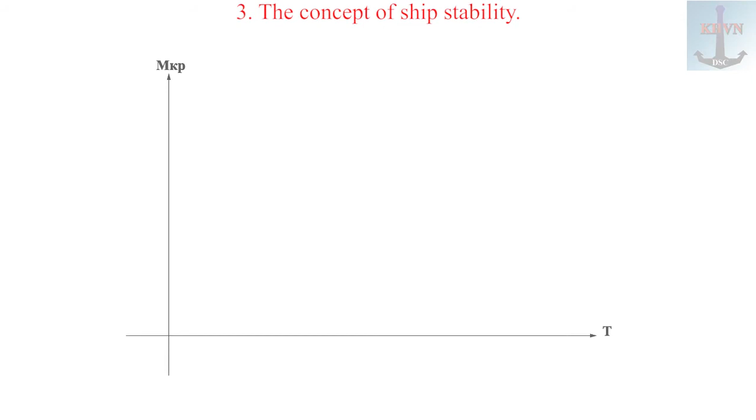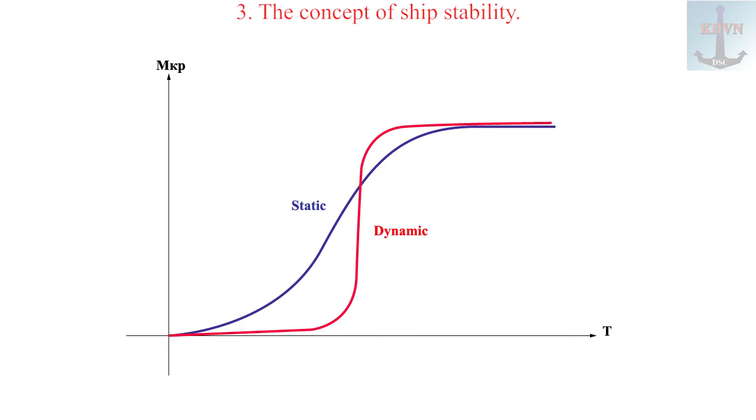From the nature of the effect, static and dynamic stability are distinguished. On the graph, dynamics are shown in red, statics in blue. It can be seen that the dynamic moment is more rapid in time.

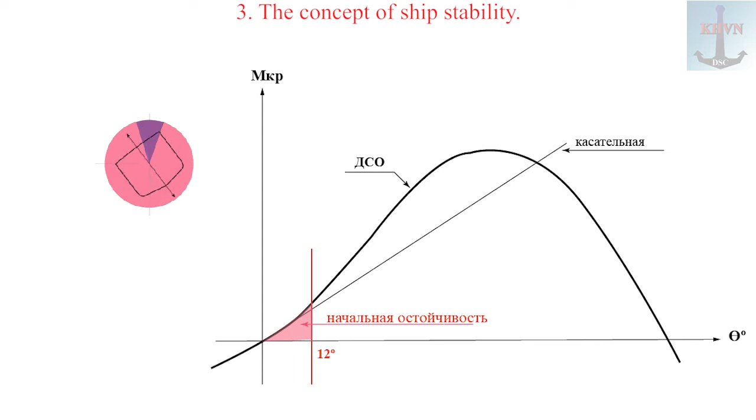Statics differs from dynamics in the absence of inertia forces and water friction resistance. Stability at small angles of heel, up to 15 degrees, is called initial stability and is different from stability at large heeling, where slightly different rules apply.

3.1 Metacenter and stability limit. To begin with, let's deal with the metacenter, point M. Other points G and B, I hope, are clear - see the last lesson. In the theory of vessel stability, there is a concept of three metacenters: initial metacenter, true, and imaginary. I will consider two of them.

The true metacenter is the point M1, and the imaginary one is M, without an index. The initial metacenter is not so important and is out of our interest.

Let us consider the projection of the midsection of a ship afloat with good positive buoyancy. We heel the vessel by a virtual heeling static moment to the right and observe the behavior of point M1, the true metacenter, and point M, the imaginary metacenter.

With initial stability of 12-15 degrees, these two points practically coincide. Increasing the heel more than 15 degrees, the true metacenter M1 begins its downward migration along a curve called the evolute, and then continues its slide down the direction of the support force.

At the same time, the imaginary metacenter, point M, remains motionless for a long time, which is what makes it convenient. That is why this imaginary metacenter appears on all diagrams and drawings and is used in all practical calculations.

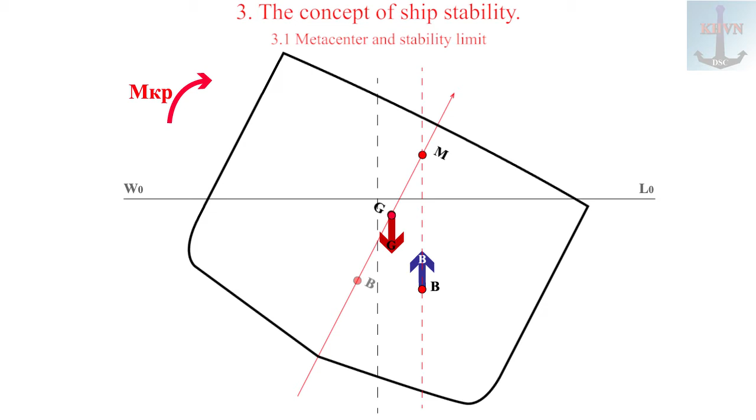Therefore, I remove the true metacenter M1 from the animation and leave the point M on the screen, the imaginary metacenter. In the future, it is simply referred to as the metacenter, denoted by the letter M, without any index.

Let me remind you that it is the point of intersection of the guiding support force B with the center plane of the ship.

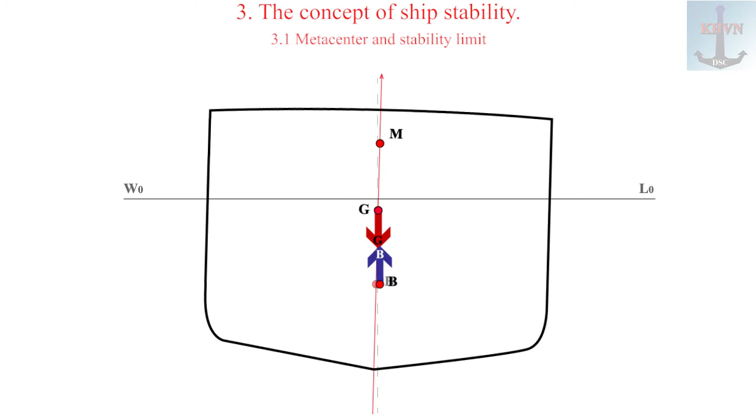Let's play the ship virtually heeling until it capsizes. The metacenter will be stationary up to a certain angle of heel. In this example, it is about 27 degrees when the deck entered the water.

The metacenter, which until this moment was not mobile, will begin its movement down along the z-axis. The ship begins to lose its stability.

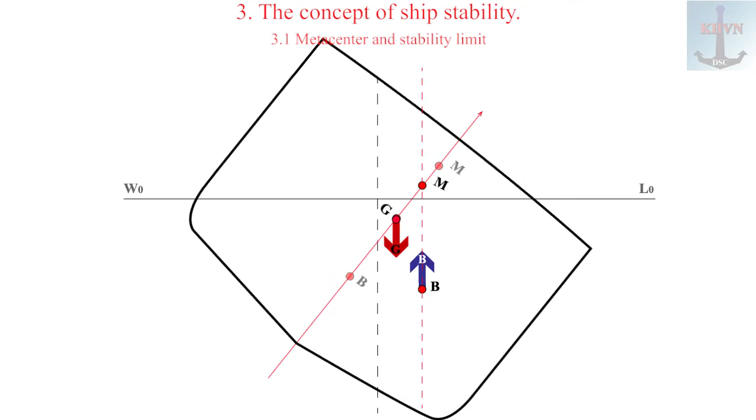The process will accelerate after the exit of our left shoulder from the water, that is, when the immersed volume of the hull begins to change significantly and the center of buoyancy, CB, begins to move back, to the left.

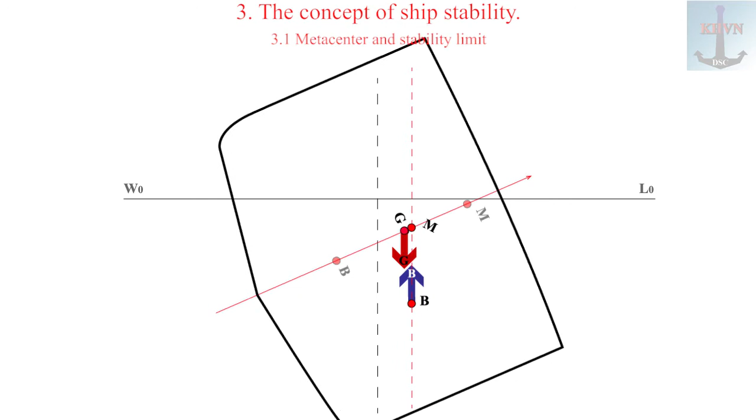When the metacenter reaches the center of gravity, CG, a position of indifferent equilibrium sets in. Here it is a heel of about 25 degrees. The ship is indifferent, according to the principle: we were pushed, we fell, we were raised, we went.

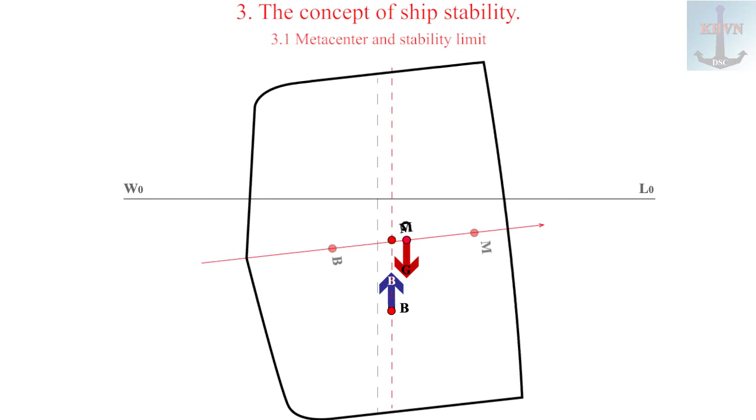Therefore, at the slightest increase in the heeling moment, the metacenter will be below the CG and a couple of forces will already help roll it over. The ship is doomed. 3.2 The position of the metacenter M and the center of gravity G.

From the geometry of the figure on the screen, it can be seen that the value of the metacentric height depends on the position of the points M and G.

So, the position of the metacenter M depends to a greater extent on the shape of the ship's hull. The decisive role is played by the width of the vessel, as well as the height of the side and draft. The figure shows two vessels with different widths, but with the same displacement.

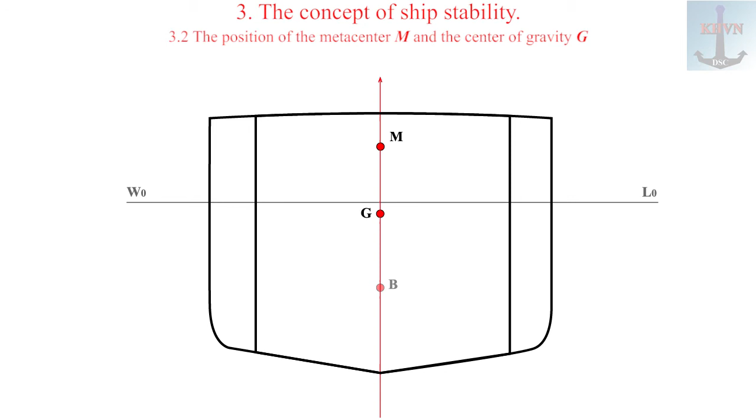One is long and narrow, the other is wide but short. The list for both is set the same.

Obviously, to heel a wide vessel takes more effort than a narrow one. With the same draft, they have different volumes underwater, so different center of buoyancy movements, and metacenters located at different heights.

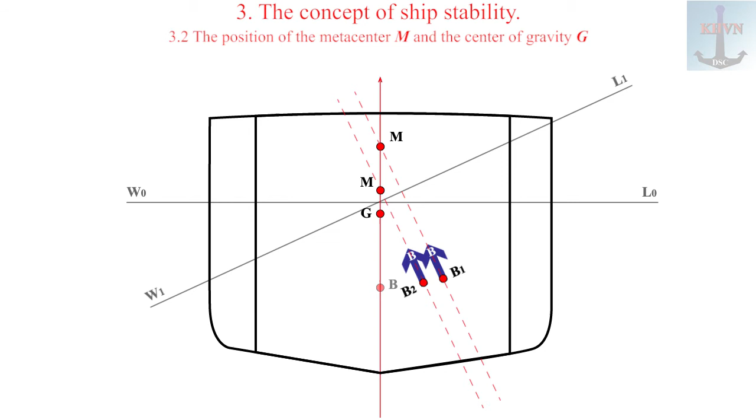I state without any calculations that a tug or supplier is more stable than any cargo vessel. A heavy lifter does not count.

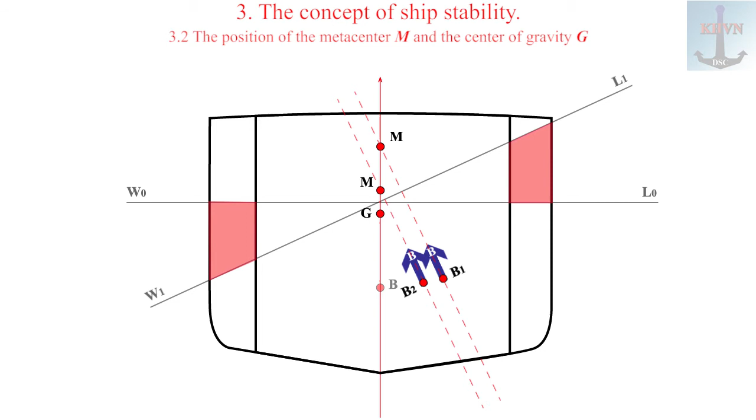The height of the center of gravity, G, depends on your load condition, therefore I'll get ahead of myself and say how you load, so you swim. There is a simple rule: heavy cargo down, light load up. More on this in later lessons.

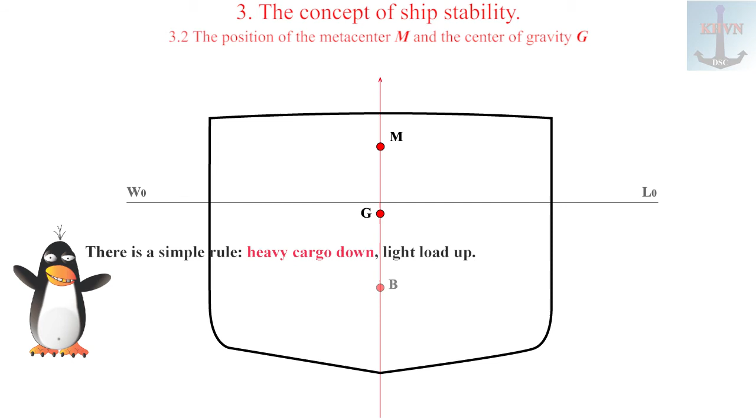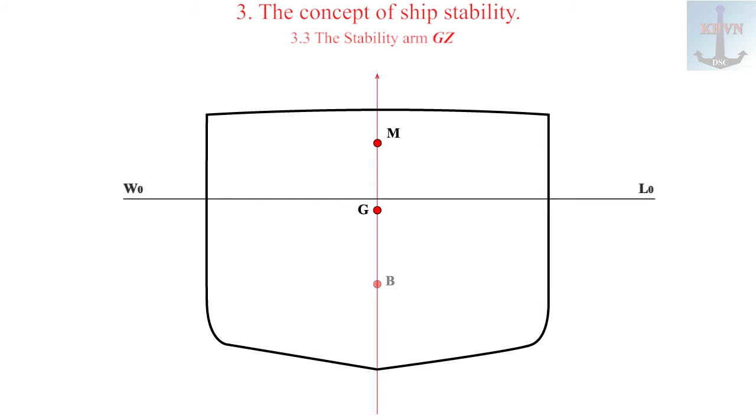Stability arm GZ. Again the projection of the midsection, vessel straight with positive buoyancy. The forces are balanced, G equals B, according to Archimedes. Force G is the weight displacement D we have. Force G equals displacement D, and equals gamma V, formula 3.1, where V is volume displacement and gamma is the density of the water.

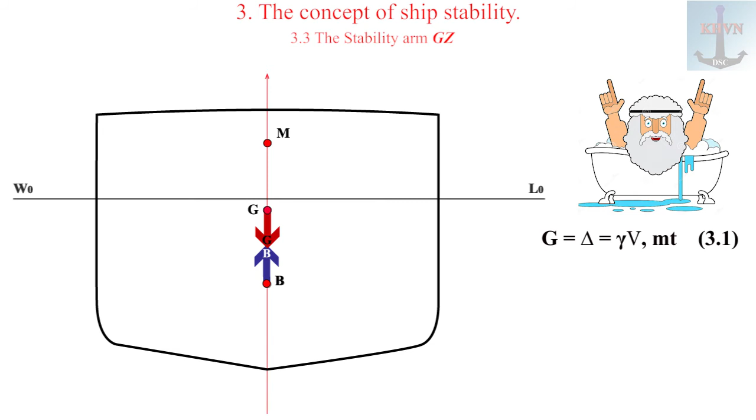Heeling to the right is played again. When the ship is heeling, the center of gravity, point G, does not change its coordinates, but the center of buoyancy, point B, shifts according to the displacement of the submerged volume, essentially its geometric center.

Between a pair of forces, equal and oppositely directed, an arm GZ arises, the shortest distance between the guides of these forces, which is called the arm of static stability and is one of the most important stability criteria. A pair of forces and an arm form a moment tending to return the ship to a straight position.

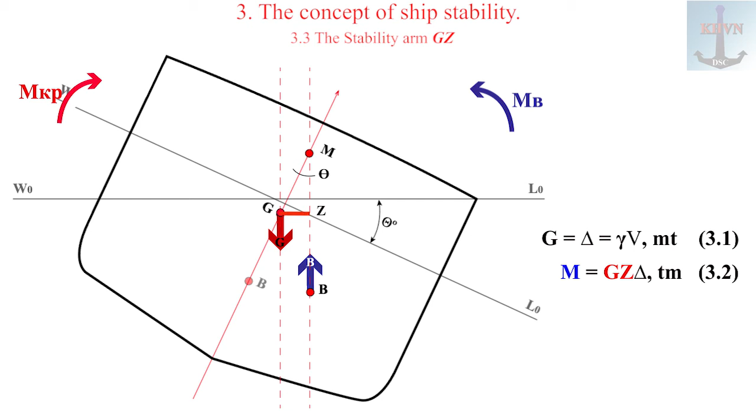This moment is called restoring. Moment equals arm GZ multiplied by weight displacement D, formula 3.2. This restoring moment will return the ship to a straight position when the listing stops.

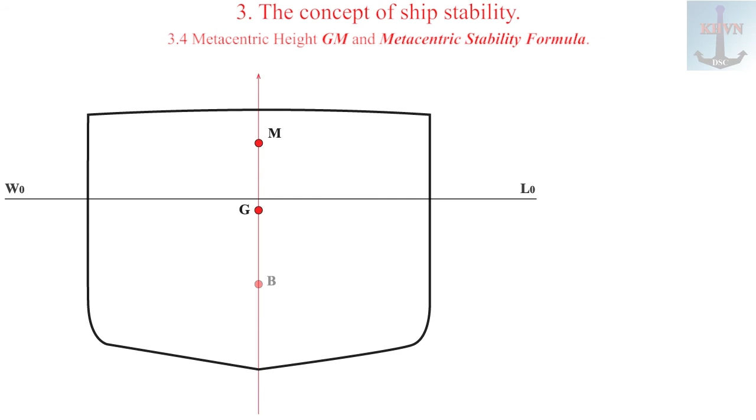Metacentric height GM and metacentric stability formula. Let's play the heeling again and analyze the right-angled triangle at the metacenter. The hypotenuse is the metacentric height GM, and the static stability arm GZ is the leg. The angle theta opposite to this leg is the heeling angle.

The dependence of the static arm GZ on the bank angle theta is obvious in the formula: GZ equals GM multiplied by the sine of theta, formula 3.3, where theta is the angle of heel in radians, degrees divided by 57.3.

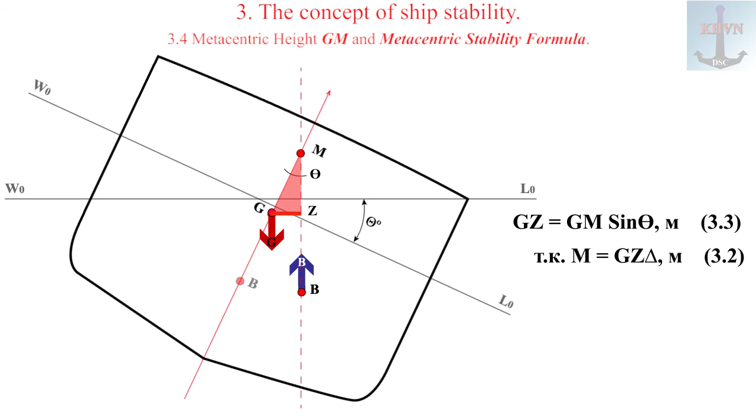If we transform formula 3.2 by inserting formula 3.3 into it, we obtain the desired formula 3.4. The restoring moment is equal to the product of the weight displacement times the metacentric height and the sine of the heel angle. This equality, 3.4, is known as the metacentric stability formula.

Thus, the values that, for a given displacement D, affect the value of the restoring moment M, and the ship's stability, are the static arm GZ and the metacentric height GM. These values are included in the stability criteria of both the IMO, International Maritime Organization, and the Russian Maritime Register of Shipping.

Pay attention to the metacentric radius r, which is the radius only on small heels, less than 15 degrees. With large heels, as a result of large changes in the submerged part of the hull, the movements of point B occur along a curve different from the arc of a circle with this radius, therefore formula 3.4 is used only for initial stability, up to 15 degrees.

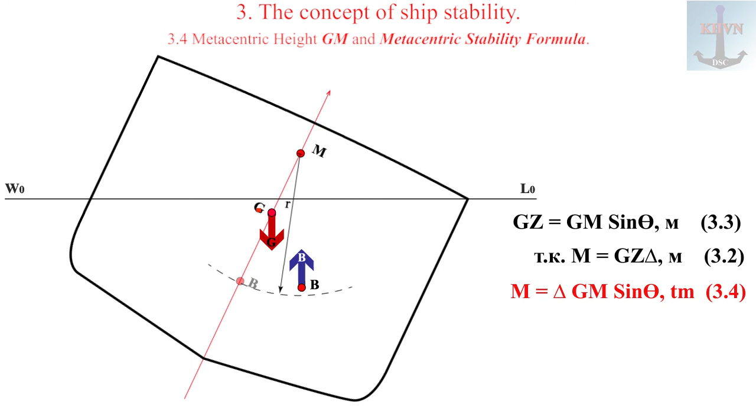Resume. First, static and dynamic stability are distinguished by the nature of the effect. Statics differs from dynamics by slowness and the absence of inertia forces and water resistance. Second, stability at small angles of heel, up to 15 degrees, is different from stability at large heels and is called initial stability, in which other rules apply.

Third, M equals D times GM times sine theta, the metacentric formula of stability, valid only for initial stability, up to a roll of 15 degrees. If applied further, large deviations arise.

Fourth, the metacentric height GM and the static stability arm GZ are the most important criteria for the ship's stability, values of which are included in the requirements of the IMO and the Russian Maritime Register of Shipping.

In practice, having made the first calculations and having received the value of KG or GM, one can immediately draw the first conclusions on stability and understand whether to move further in the calculations or if it is necessary to redistribute the load.